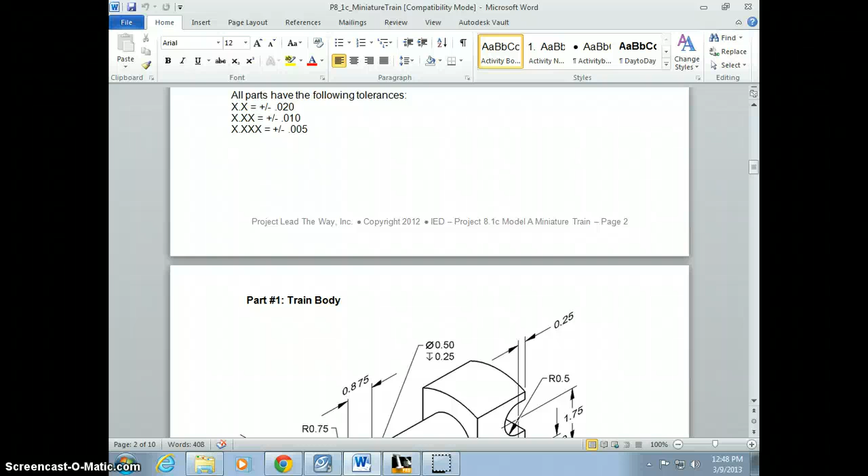Alright, so here we go. We're going to make the train. What we're going to start with is just the train body, because it comes up first. So here we have two different views. We have one that deals mostly with the back view, and then one that deals with all the other dimensions on there.

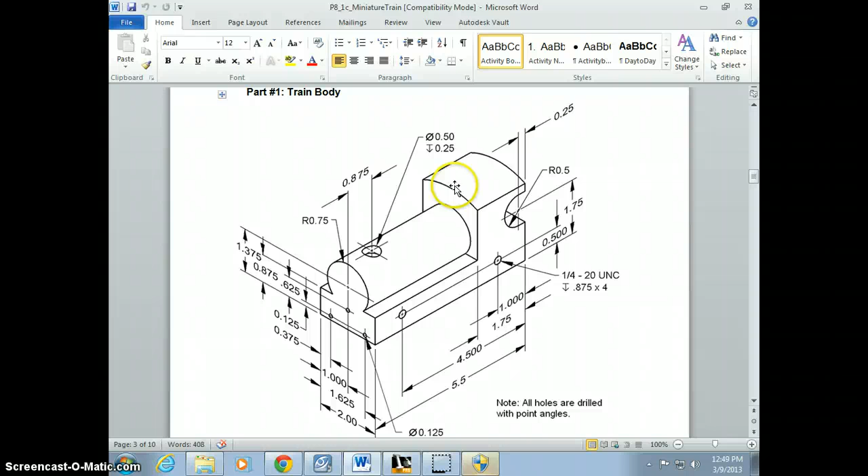So what we want to do is open up Inventor. I already have my project selected, so you can see here I have my project done. I'm going to create a new standard part, and I'm going to create a 2D sketch. For me it's easiest to actually draw this in one big block, so I'm going to draw this whole overall shape and then extrude that back and make these cuts through here.

So I'm going to start by, like I said, making this overall block. To start with that, you want to start by looking at the back side here. You can see that this radius gives us the arch for the top. The top cab part gives us that circle half arch radius. And you can see that it points down to this hole. So this hole for the hitch and the magnet shares the same radius as the overall arch.

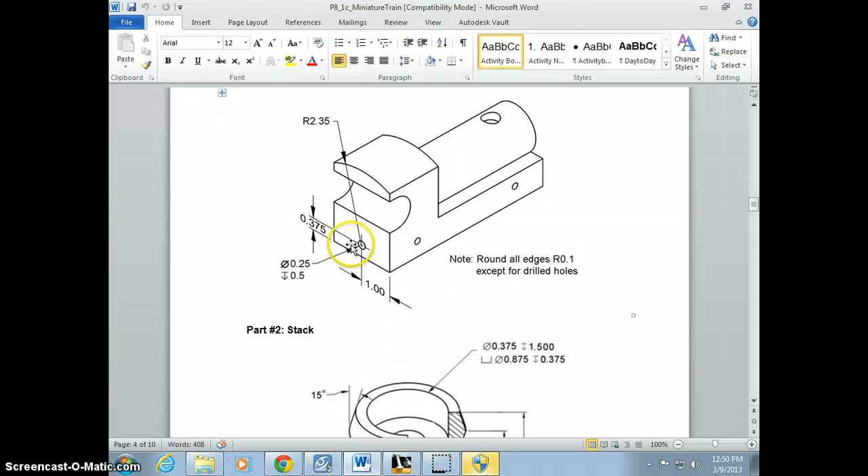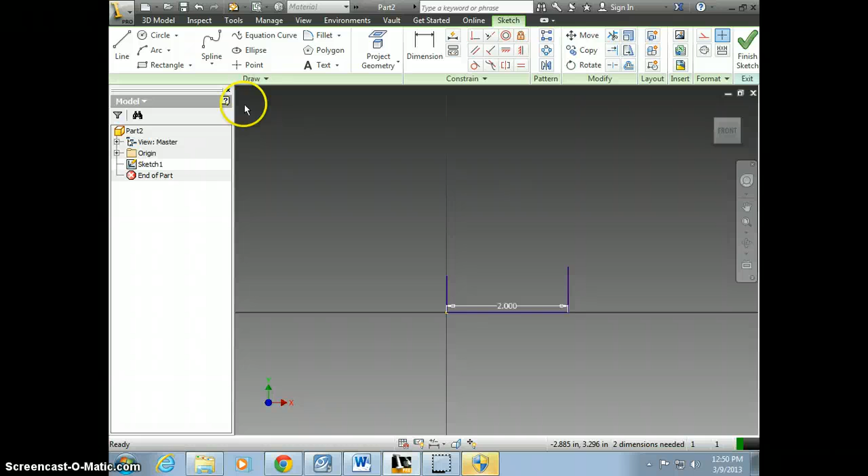So I'm just going to start by drawing the back side. I can go back and look, it was 2 inches wide. So I'm just going to type in 2, and make 2 lines up. What those lines represent are these lines coming back up right through here. I don't necessarily need to dimension those, because I'm going to use my extend button in a second.

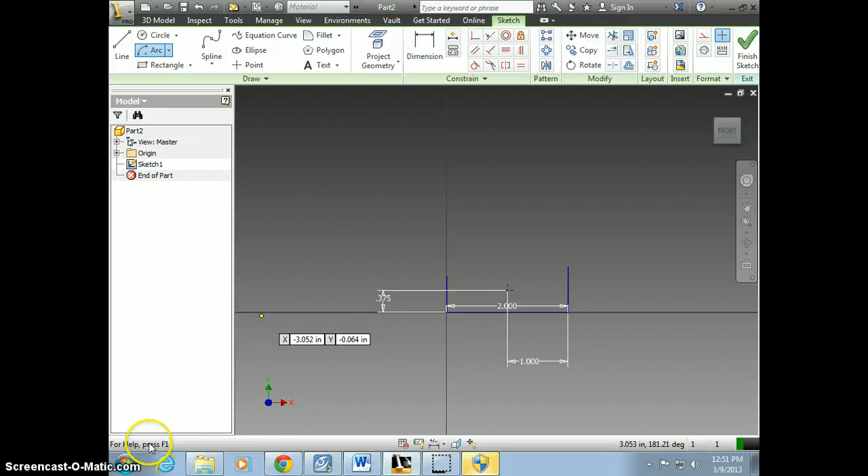So I'm going to create a point, and this point needs to be centered, or 1 inch in. So I'm going to dimension that, 1 inch. And then from the bottom to the top needs to be 0.375, read from this dimension right here. Hit OK. Next I want to do my radius, which is 2.35. I'm going to do a center point arc. It says select center, if you look in the lower left hand corner. That's the center point I created, and I'm just going to draw that arc right there.

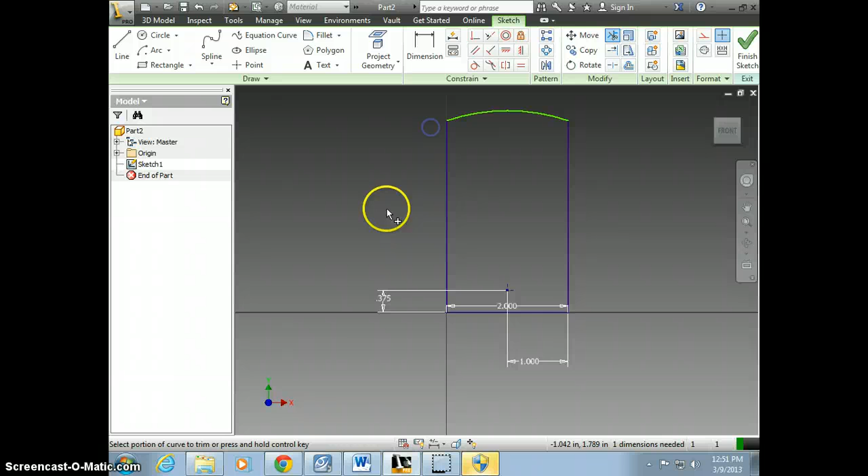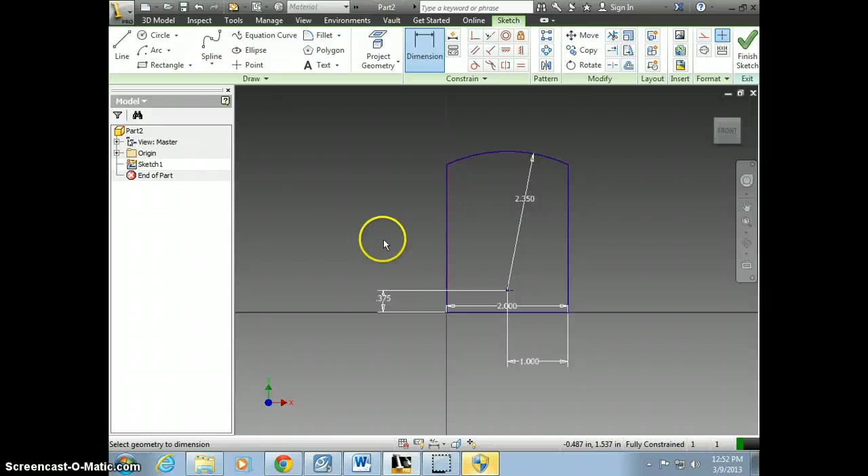From here I can extend these 2 lines up to the arc, and then trim off the rest of my arc. Okay, so I have that. I should be able to dimension this. I forgot to do that: 2.35. So there I have my overall arch, or the back side I should say. Now I can extrude that to 5.5 inches overall length. I'm going to finish my 2D sketch and extrude it 5.5. So now I have that overall block.

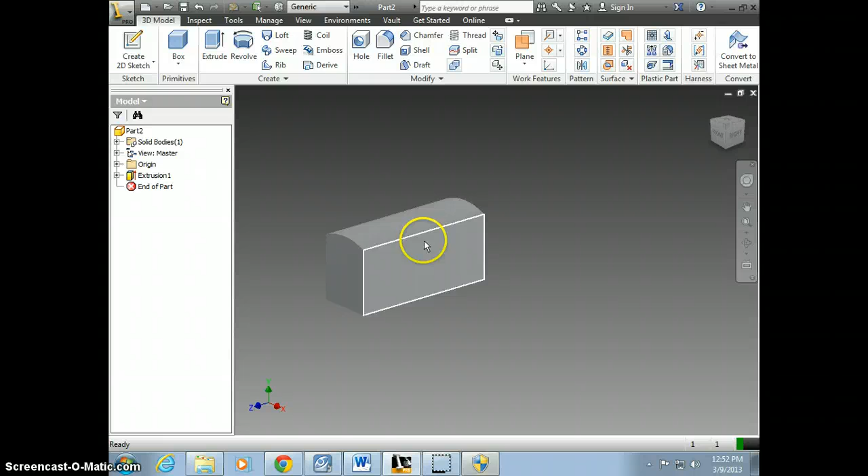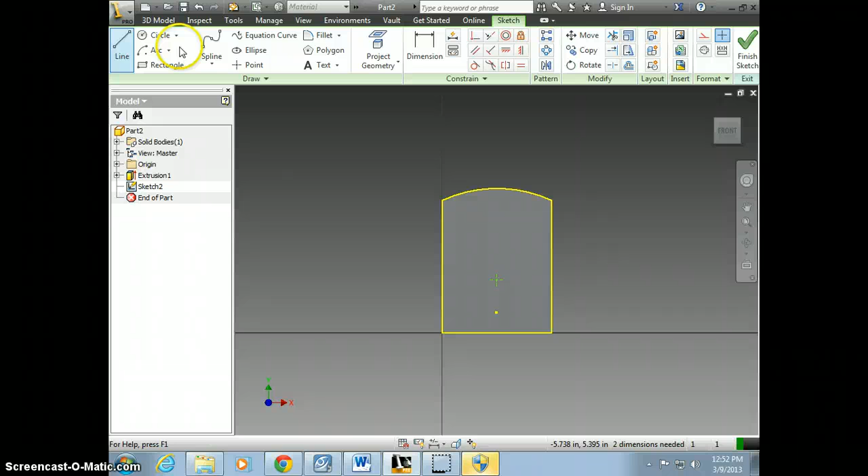Now I'm going to create a sketch on the front and make this cut to get the barrel, or whatever you want to call it. I have a center point here, so I'm just going to start working off of that. I know that it's 1.375, or 1 3/8 inches up. So I'm going to center that and dimension it so that it's 1.375 inches. That gives me that center point right there.

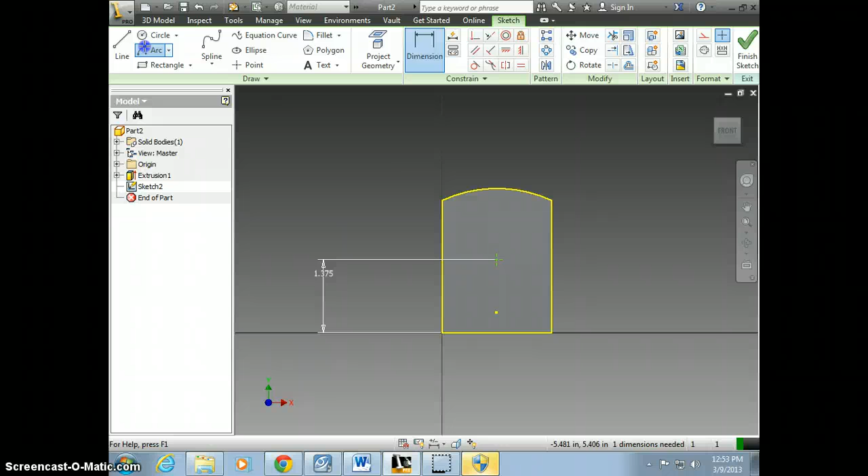Next I can make this radius. Same thing, start with the center point arc. This is going to be my center point, and I'm just going to draw almost a complete arc. Don't forget to dimension it, and the radius there was 0.75.

Now I have these lines coming across here, so I'm just going to draw a line here and a line there. Let's see, how high is it supposed to be? 0.875. So I'm going to dimension that from that line down to the bottom, 0.875, and same thing with this line, 0.875. It doesn't say how long these lines are, because we just have our radius of 3/4 of an inch and where those two lines intersect. So I'm just going to trim that all up.

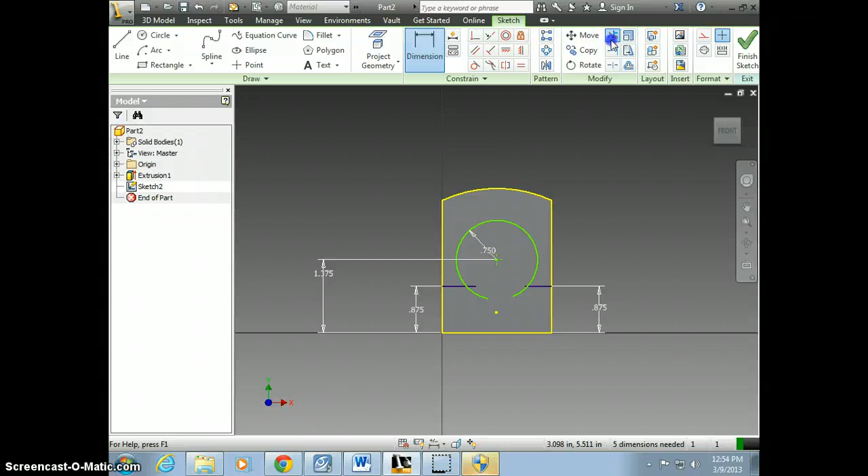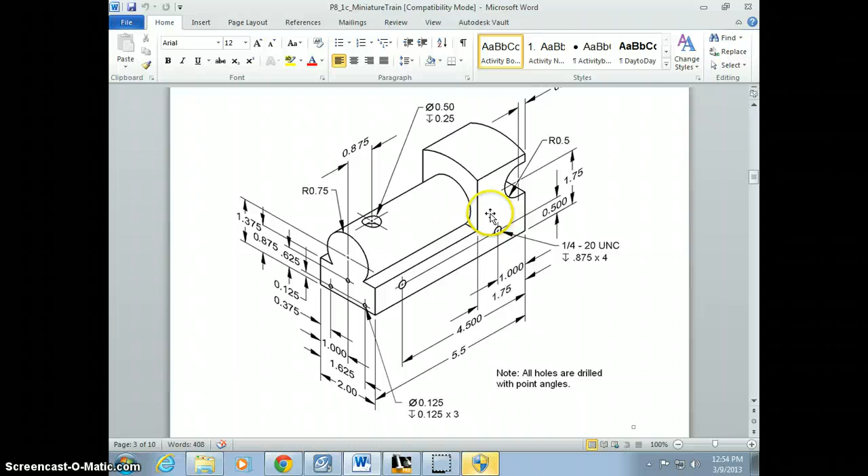I'm going to use my trim button, that one as well as that one. And just so I can lock this in, that's supposed to be an inch. Now my sketch is fully constrained. I can finish my 2D sketch, and this overall is 1 3/4. That's the length from this edge to this edge, so it doesn't give me the length from here to here, so I could either subtract that or

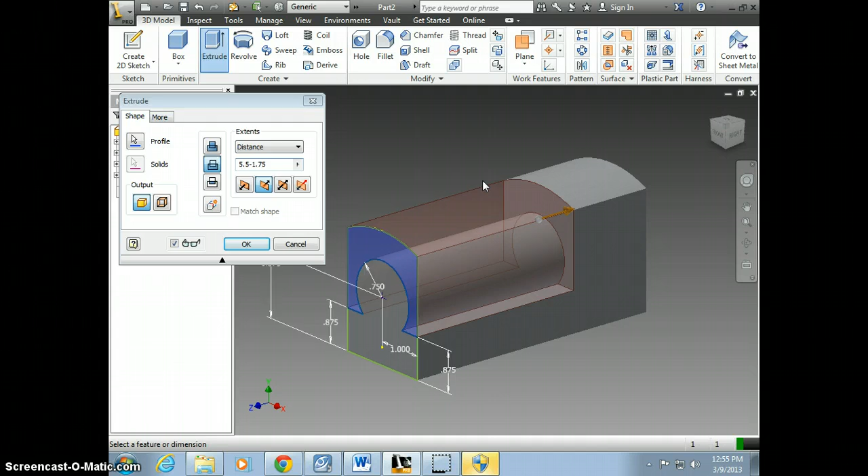I'm just going to do an extrude, select my profile, and I want that back. It already adjusted to a cut. If it's not making a cut, you have these options here. I can either type in the dimension from here to here, or I already have the 5.5, and I'm just going to minus 1.75, treat it like a math problem, and there I have my overall shape.

Then to continue with getting the overall shape, I can worry about these holes in a second. I'm going to place a sketch on this view. Create a 2D sketch there. Again, I'm just going to start with my center point. Okay, and I'm just going to place that. It's 1 3/4 up, and it is also 1/4 inch in. Okay, so I know that I have from here to here, 0.25, 1/4 inch, and I believe I said 1.75. Yep, so 1.75 radius. Again, center point arc.

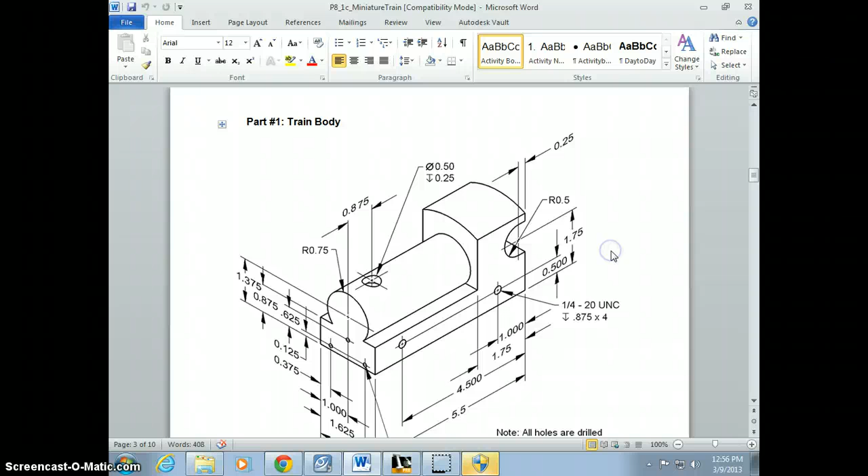So you're selecting center point starting at the center. So select the center of your arc. I want that here. I'm just going to make that. Come back and dimension it. The radius of 0.5. Okay, so that's 0.5 from there. And all I'm going to do is start, I have my line selected.

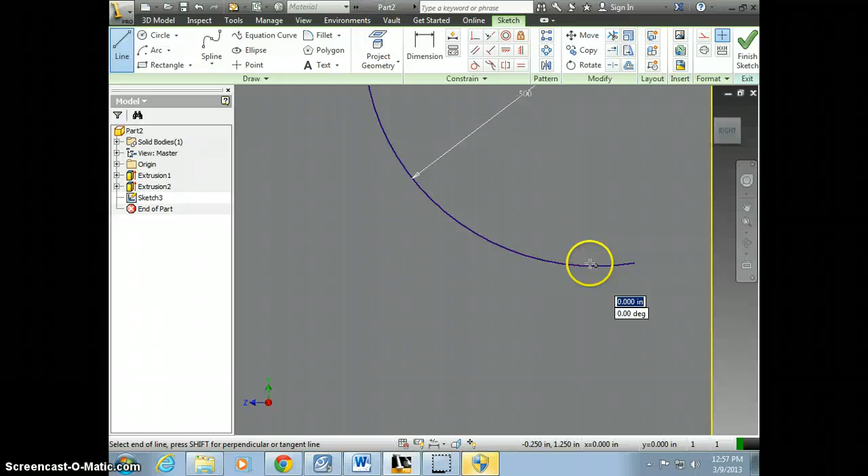I want from the center point, and notice how right here you have the tangent symbol show up, and I want to make sure that this line is perpendicular. You can see that constraint showing up right here, kind of that upside down T, that the line I'm making right now and this vertical one of the edge are perpendicular and this one is tangent. Okay, so I want to make sure that is happening on both the top and the bottom, and go from there. And then I can trim up my arc.

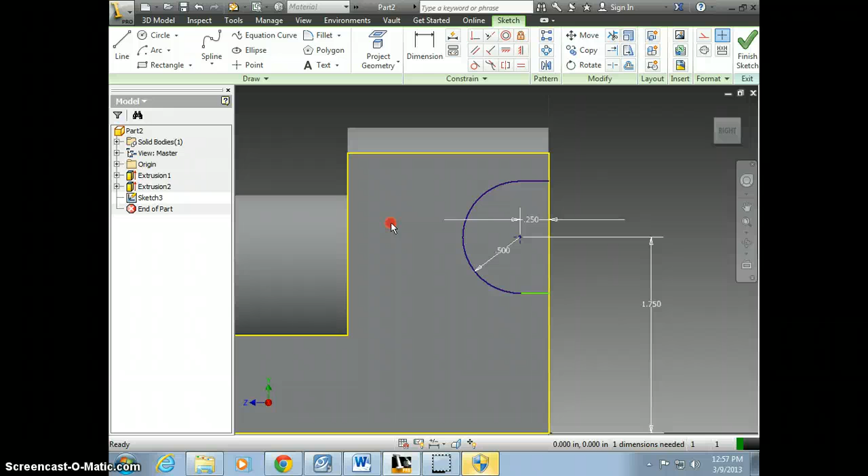Okay. So I have that, and I believe that's all I have on that view. So I'm going to finish my 2D sketch and extrude that, make a cut, and for this time I'm just going to say through all. So that's just going to go through everything right there. Now what I can do is start doing these front points where the cow catcher itself is going to attach to. And that looks kind of thick. 0.875. Okay. I guess that's right.

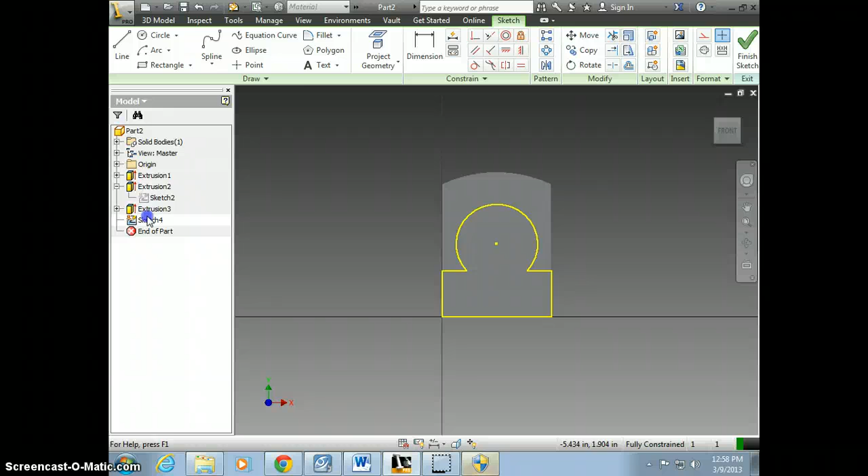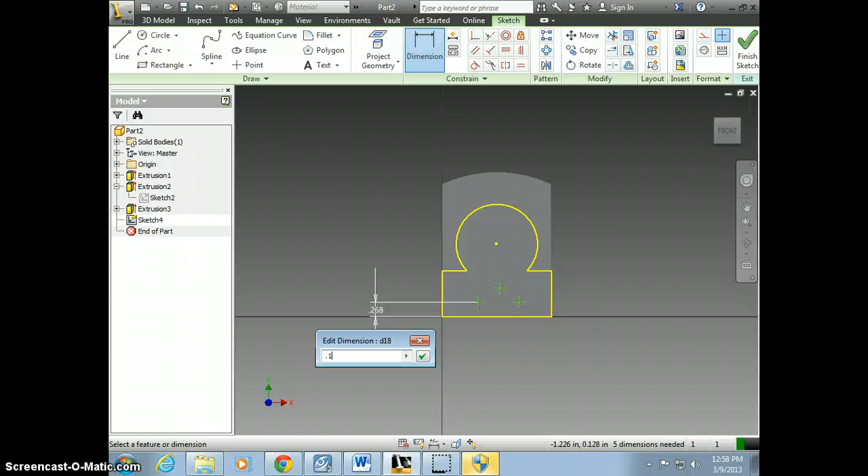But what I'm going to do is make sure I'm in the sketch. Click my points, and I want to try to get off of any constraints. And I'm just going to place those there. So if I zoom in here, it's saying that the center point of these holes are 1/8 inch or 0.125 from the bottom. So I'm going to go ahead and dimension that. From there, 0.125. Here, 0.125. And this hole height-wise is 5/8 of an inch. So from here to here is 0.625. Yep, 0.625.

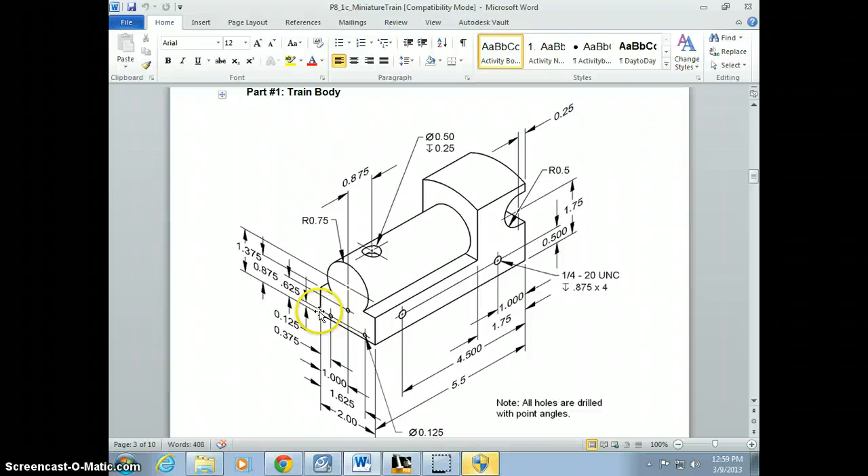And this hole is centered, so it's 1 inch in, and this hole itself is 3/8 of an inch from the left side. I could either dimension it from here for the center, width-wise, or from this top edge. I'll just do that because that's how the dimensions say it. It's going to be the same thing on this side. So 1.625. Yep. And we don't need to worry about the diameter, because when we're working in Inventor, anytime we have a hole, we're going to use the actual hole tool. And this is 1 inch in, so that's 1 inch.

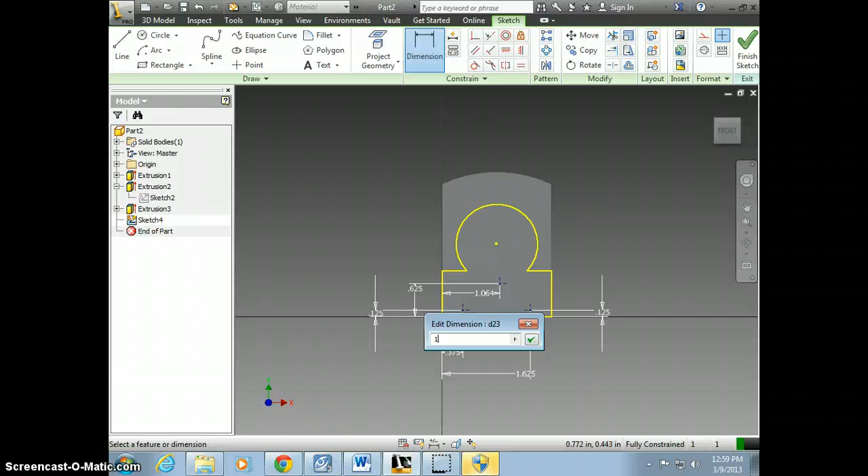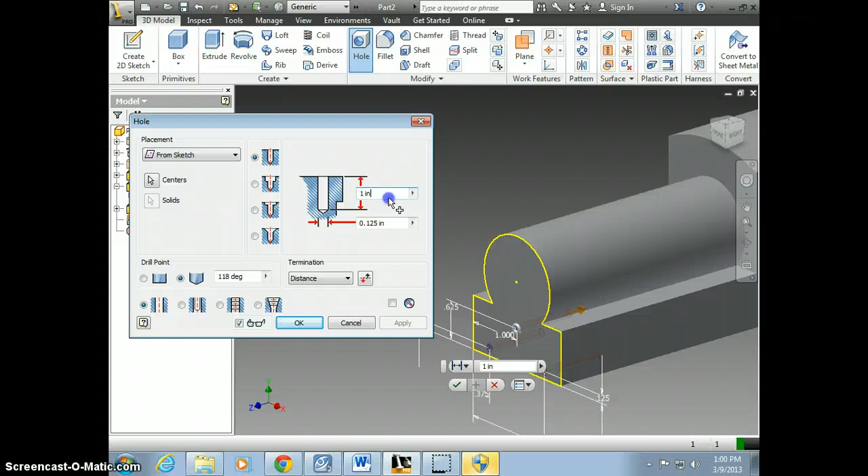Finish my sketch, and my hole. Notice how it's picked up those 3 center points. So you may have to actually click those. The diameter it's saying is 1/8 of an inch, so 0.125 at a depth of 1/8 inch as well. So what I want to do is select distance, that pull down menu right there, and that's going to be the same, 0.125. Okay, there's my 3 holes. Now I can work on the holes for here.

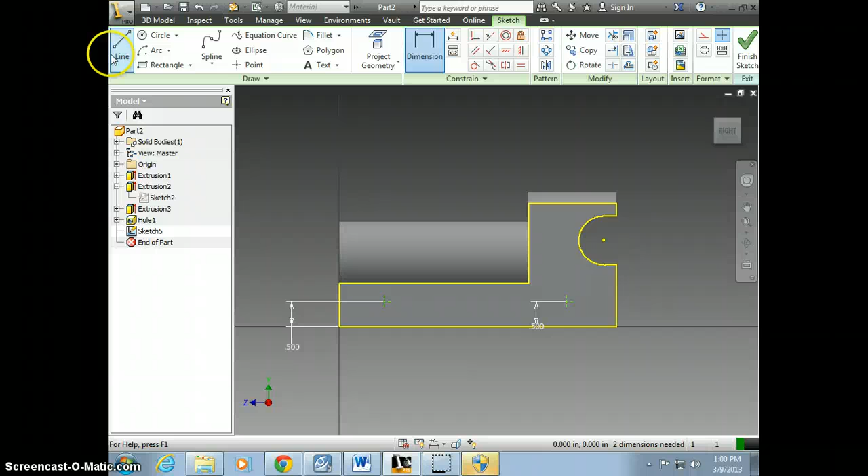Create a 2D sketch, and same thing. I create a point, and I'm just going to go from there. Dimension 1/2 inch, 0.5. There, 0.5 up, and this one is in an inch, and this is 4.5. It's an inch. Here to here, 4.5. Okay. Finish my sketch. I have a hole. And that was a diameter of 1/4 inch.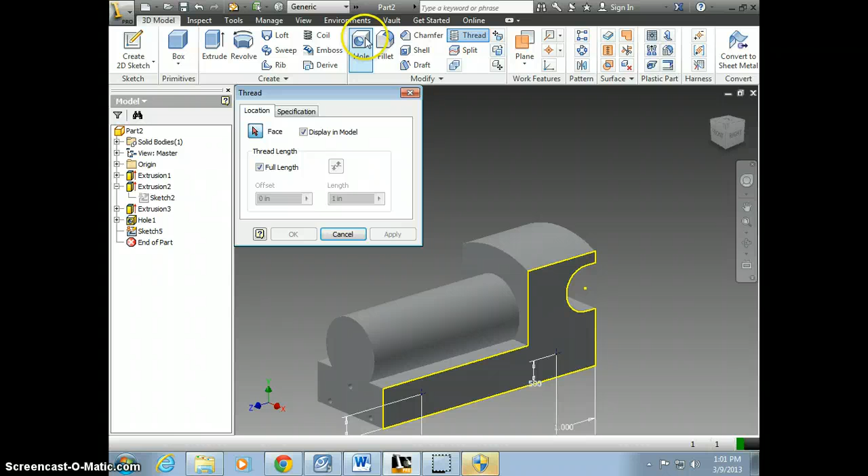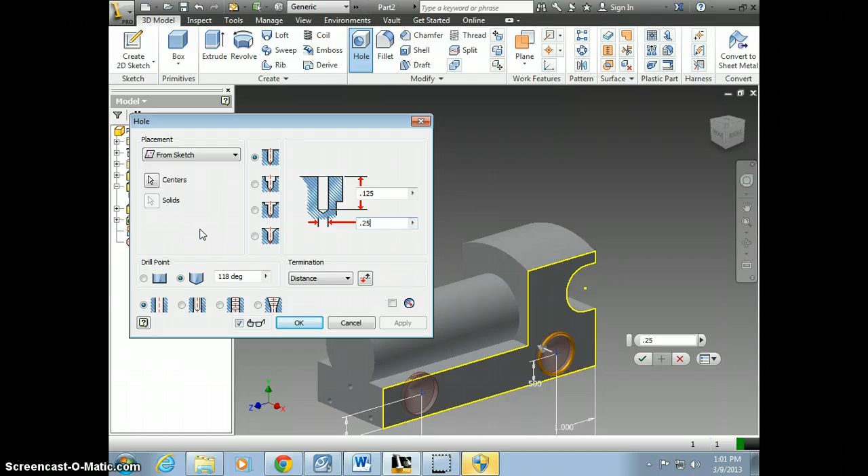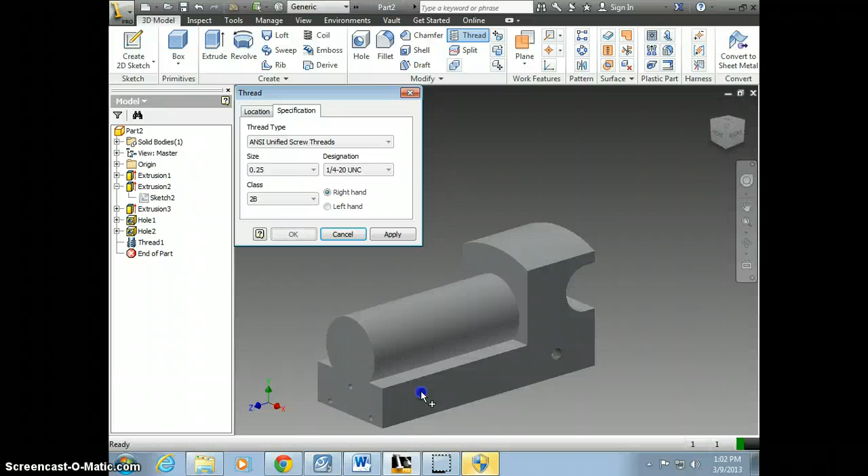Okay. I'll show you this thread. Hole. So I have my depth of 0.875. Oh, that was diameter. Sorry. So diameter is 1/4, 0.25. And this was 0.875. I can put my thread on this face, and we already have it selected. 1/4 inch. Apply. Same thing for that face. Apply.

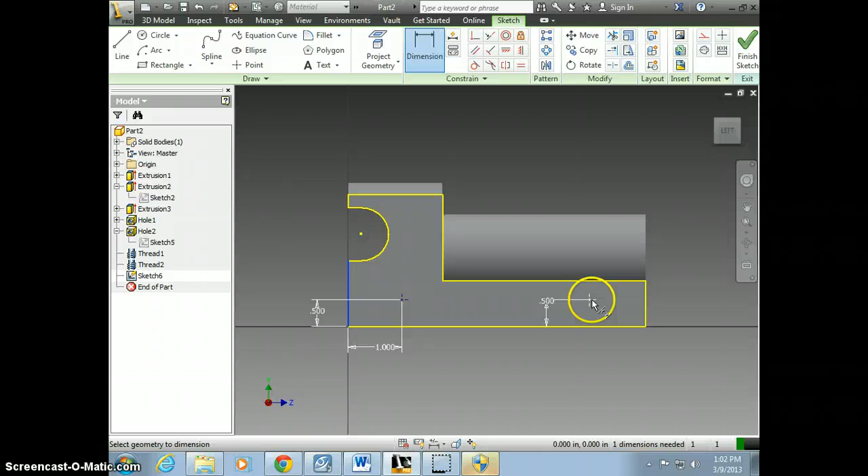And I believe I had everything dimensioned out. Holes were the right depth and everything. Yep. So then I just have to go on this side, create a 2D sketch, place those points, and 1/2 inch up. What was it? Inch and 4.5. So inch from the side, and 4.5 inches from the back. Okay, finish my 2D sketch, and from here I'm going to use my hole again. So 1/4 inch, and it was 0.875. I have both of them selected.